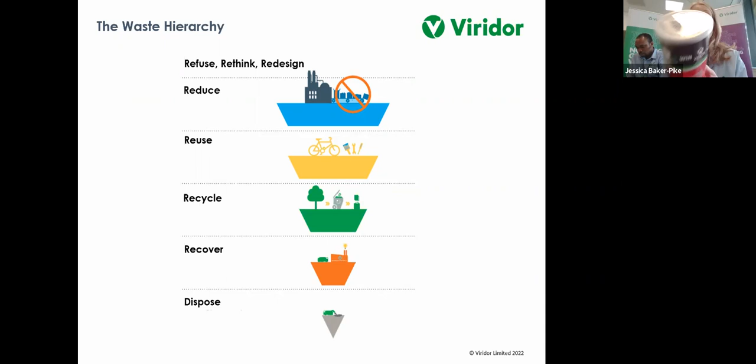At the top then, as consumers, we can all make choices about what we buy. We can refuse to buy certain bits of packaging. I don't know if you can work out the brand of this packaging I'm holding up, but it packages crisps using plastic, foil-lined fibres, cardboard, and metal.

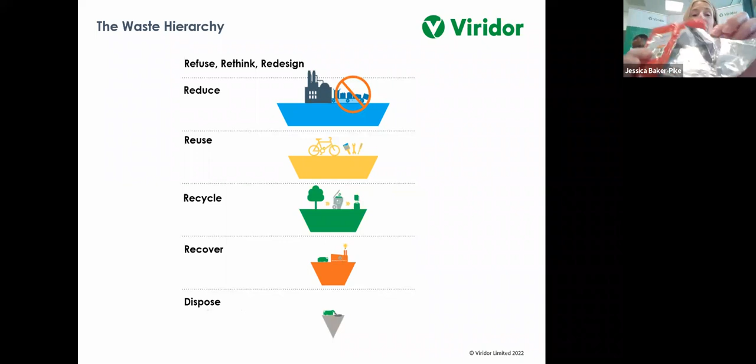Really, there are more efficient packages for crisps that use a lot less material and can now be collected for recycling across the UK. So we can make choices as we buy things, and work with designers to rethink designs so that the materials made, the things we buy, can be processed right through that whole life cycle, including what happens once it goes into a bin.

So we work with designers. Samples of material are sent through our processes, for example our polymers recovery facilities, to make sure they can be separated effectively. Along with those at the top of the hierarchy is to reduce, and really that just means buy what you need.

That is the most important thing. As a company, we have our procurement teams managing that for us, but we're all individuals - we all have the opportunity to make choices, as I say.

The next level down is to reuse, and for us that means keeping things in use for their designed purpose - fixing things. Here, of course, on a large industrial site, we have technicians whose role day in, day out is to monitor parts and fix them as necessary.

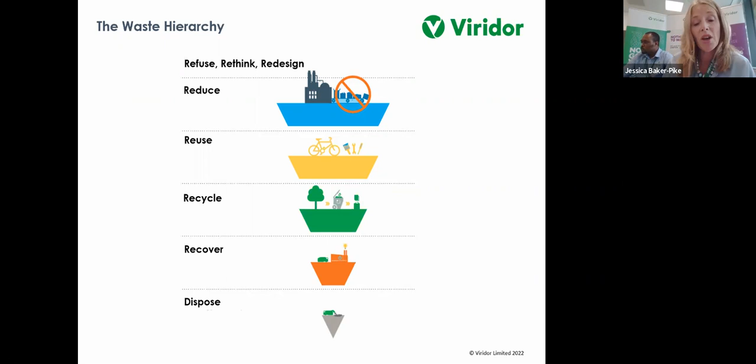So we operate the largest fleet of energy recovery facilities in the UK. Here you can see a view of them. They operate across Scotland, Wales and England, and most of our facilities have two line processes, which gives us both the capacity and contingency.

They normally treat approximately 300 to 500,000 tonnes each per year, so significant amounts of material received daily at all sites. Runcorn is our largest, and that treats over 1 million tonnes of non-recyclable waste. It takes waste from Manchester and the surrounding area, and is run as two businesses.

Runcorn is going to be our first site to have carbon capture technology installed.

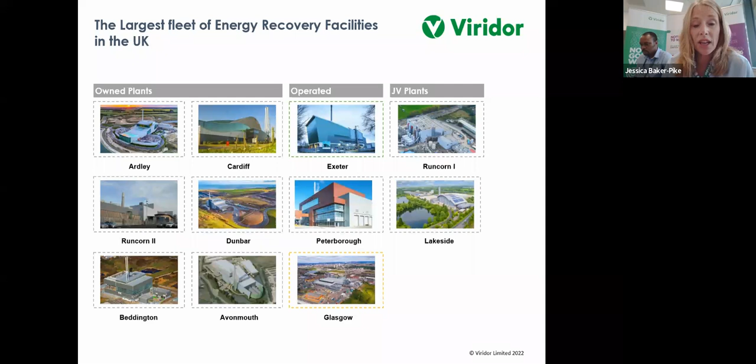Ardley Energy Recovery Facility is the place where Innocent and I are both sitting right now and where we work. It's located just south of Junction 10 on the M40, south of Banbury. So driving around the area, as I'm sure you do, you may have seen it clearly from the M40.

The history of the site is that it was a limestone quarry, and waste has been brought here for treatment since about the 1960s. You can see some of the history from this site in this aerial photograph, which was taken during the commissioning stages of the energy recovery facility.

But as I say, the advantages of having the building we operate in are that we can control the air within it, which is much better in terms of containment and controlling the gases.

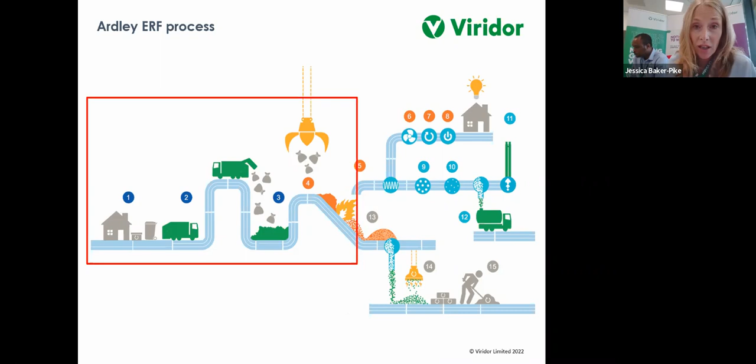We receive it and it's delivered into a store, where the material is mixed to make it the best fuel it can be and lifted up high so it can fall down as it's burnt through the process. Now I'll show you some images from within the facility - this is from inside the tipping hall.

I wanted to show you the scale of our operation - you can see a loader vehicle responsible for keeping the tipping hall floor clean. We have 10 bays for deliveries. All vehicles arriving come through the tipping hall and reverse towards the bunker to deliver their loads. We can have up to 3 vehicles in the tipping hall at any time.

So there's an awful lot of material. It comes to us first over the weighbridge, where we check documentation and make sure it's the right waste coding for us to treat, because we're here to treat just household type material - no clinical, no hazardous wastes are treated at this site.

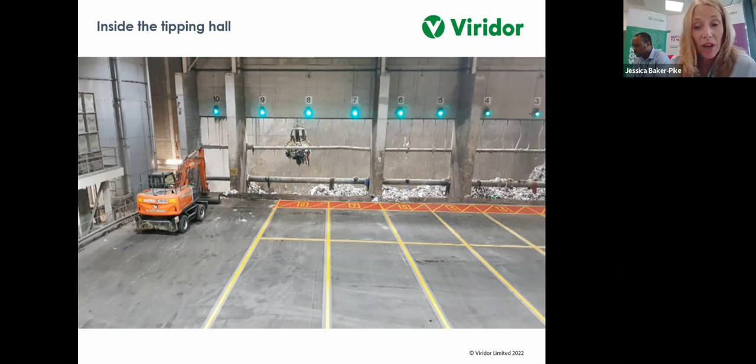This is a view from the control room, looking down on the store. There are 2 grab cranes that move on overhead gantry rails, which mix the waste, and then it's lifted to deliver it as fuel to the hoppers, which feed continuously onto the grate. So our process is always operating, 24/7.

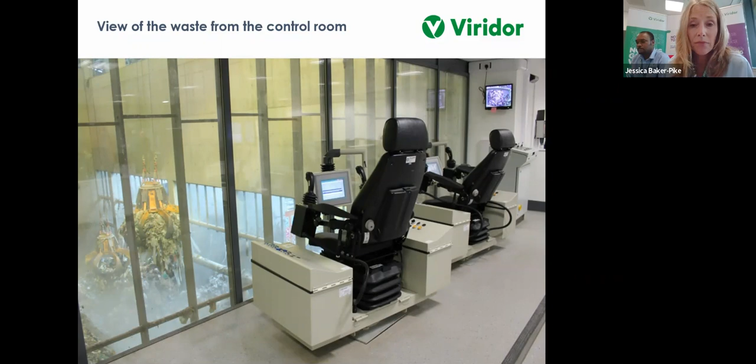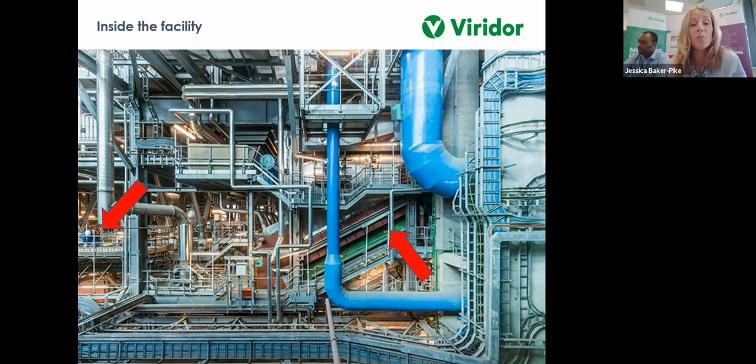So the waste is burnt at high temperatures. We must achieve over 850 degrees Celsius, and it takes approximately 45 minutes for the waste to be fully combusted as it moves down the grate.

The top line of outflow from this combustion is to generate power. Like traditional power stations, we use water to generate steam to drive a turbine, which in turn feeds the generator. As the very hot gases are sucked through a cleanup process, we pump degassed and demineralized water in pipework through the hot gases in the opposite direction, and all the heat energy moves in through that pipework, heating up the water.

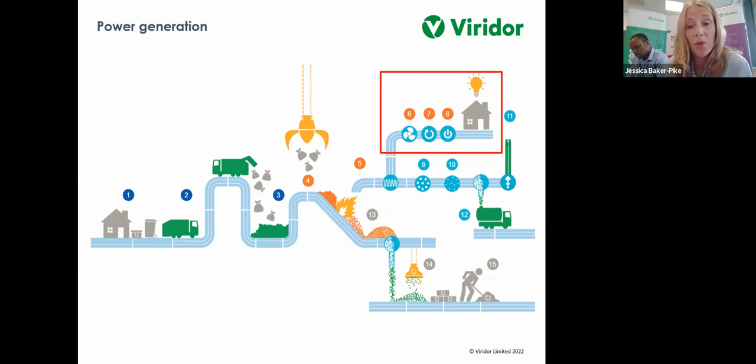The electricity flows out through these cables onto transformers, and it is used to power our process, and the rest flows through cables and leaves for export via our local substation. Then the steam condenses back into liquid water, and it's recycled again and again.

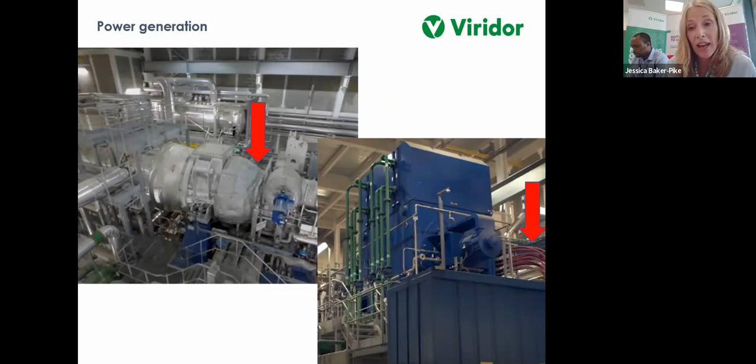The flue gas cleanup process is absolutely vital to our operations, and it's the middle line of our process diagram. It explains what happens as the waste is combusted, how we clean the gases. They are sucked through ducts as they're cleaned, and there are three processes, the first of which is within the combustion chamber, where we inject urea pellets - that reacts to reduce NOx gases.

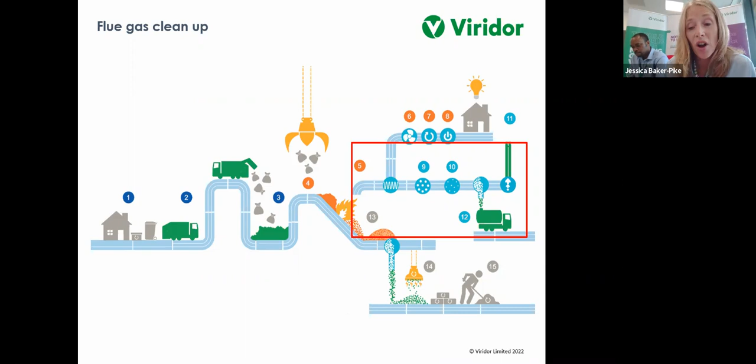We sieve those out through fabric filters, and once that material has done its job, it's termed air pollution control residue. The gases are sampled before and after the filtration system, controlled by the computer system, so that we know we are operating under our consented emissions levels.

So here's the reality of these silos for the lime and carbon. And then we've got the area where the air pollution control residue is stored, and below is the hookup where the off-taking vehicles come to remove that material.

This is an exciting thing because we have a contract with a company called OCO Limited, and they take that powder away to be made into products.

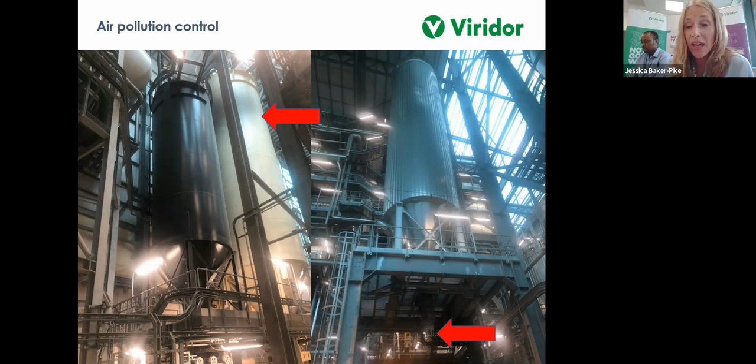So here you can see on this photo a carbon negative building block. The lime still has some reactivity, and basically that reactivity makes the difference from the air pollution control residue, which is a hazardous waste.

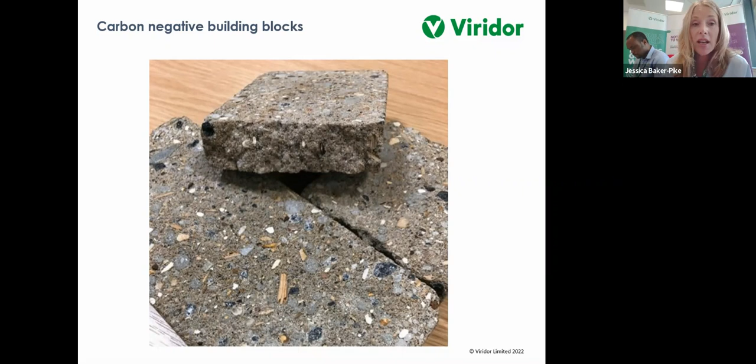OCO inject carbon dioxide into that powder, and it's like a quick limestone reaction, which encapsulates everything within the pellet. The pellets can then be put as a product into building blocks, and because it entraps carbon dioxide, they are carbon negative.

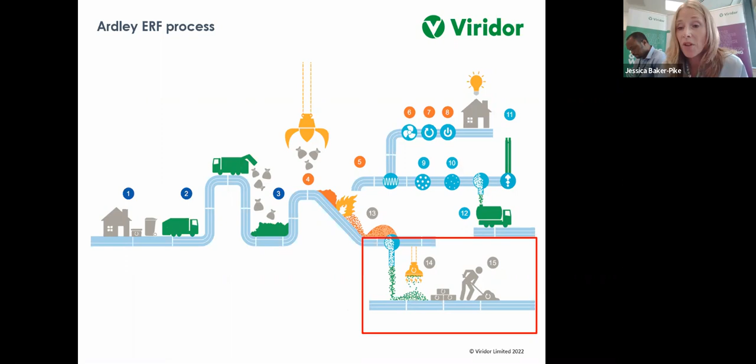So the final line of the process diagram is what we do to treat the ash. The ash drops off the grate and it's then processed into recycled products.

Here you can see it comes onto a vibrating table from both lines. In fact, the ash drops over a roller, which controls the flow of the waste as it falls down the grate, and it drops over that roller into water that we've already used at the site - that's the start of the quenching process.

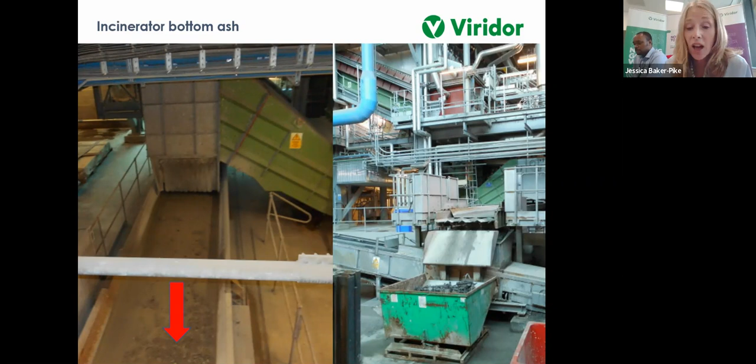Once it's been quenched and cooled, it moves onto and is pushed out onto this vibrating table, which moves and collects the ash from both lines. We then remove oversized things from the ash - they are almost always metals, and that goes for recycling. The smaller ash fragments move on through conveyors and go under magnets, which separate out ferrous material.

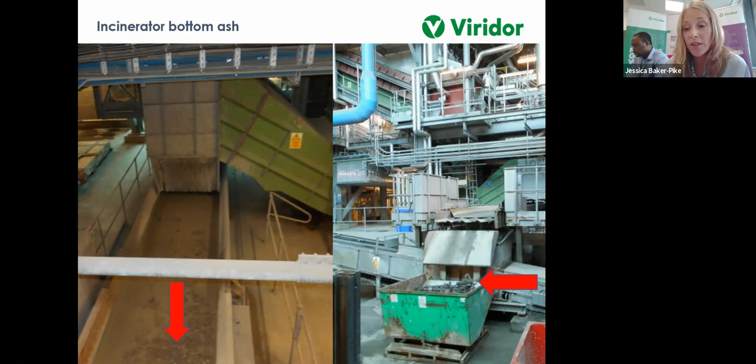That again then goes for recycling. So once the metals have been removed, the remaining ash goes on a short journey via conveyor to our co-located business partner, a company called Fortis. You should get the link for them coming up in the chat if you're interested to look them up.

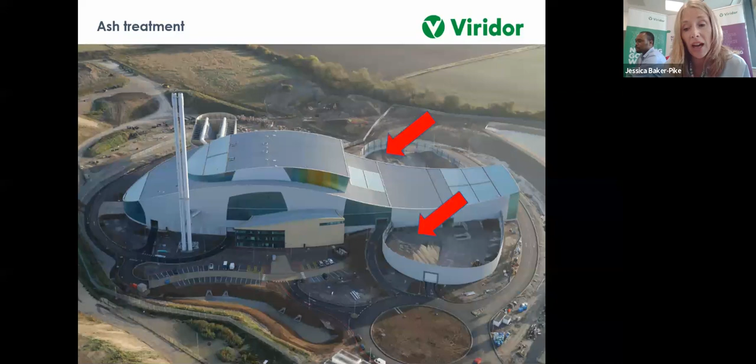What they do is store the material here, and it's sampled before it goes through their process, which removes more metals for recycling. Once that's done, it's called incinerator bottom ash aggregate, which can be used for road building. So it is in fact a product for use.

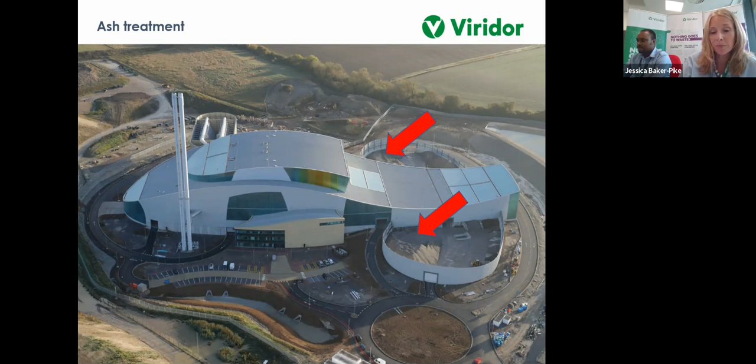So that is our process, and I'm going to hand over now to Innocent, who's going to go through the control systems we've got from environmental monitoring. Cool, thank you so much, Jess. That's okay, that was a good one.

Good afternoon everyone, my name is Innocent, as has been said. I'm just going to walk us through a bit on the Environmental Agency, Industrial Emissions Directive, and our permit here. The Ardley site is operating on Environmental Agency permits, and basically this permit is created for us to have a limit on whatever emission limit for whatever substance or particle that is coming out from our operation. These emission limits are controlled by the IED, the Industrial Emission Directive, which controls all the pollutants that come from big organizations or large facilities involved in combustion, as we are here.

If you see on the far right there, that's actually our two stack emission points where the emission particles are emitted. But it's not just emitted free to air - this is controlled by the limits given to us by the Environmental Agency.

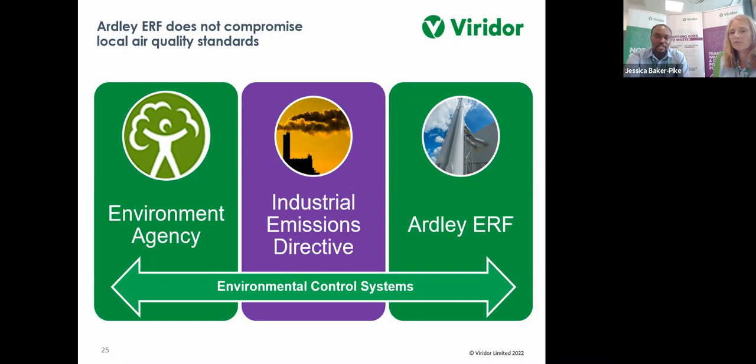I want to go through a bit of our permit, discussing both management and operations - what we do - and then I'll discuss emissions and monitoring, what we monitor. I'll also tell you about recording and how we send notifications if there's any form of breach, just to let you know we're being regulated heavily by the Environmental Agency.

Every site that has a permit has a site regulator, so we have our Environmental Agency site regulator. Just to talk about responsibilities here.

We have the site manager, the operations manager, engineering, maintenance, and EHS as well. These are people whose responsibility includes understanding everything about the permit and ensuring that we conform to that. Then we have our shift team leaders and their assistants, who we ensure understand the permit and our permit requirements and are conscious of the environmental impact.

Our engineering team, the shift technicians, even the apprentices when they join us - we make sure we train them on our permit management, and of course the tipping hall supervisor. This is the team that actually receives the waste, which we call fuel, into our site, and they ensure that whatever waste comes in has the right EWC code, the right waste code, before it actually comes into our site via the weighbridge.

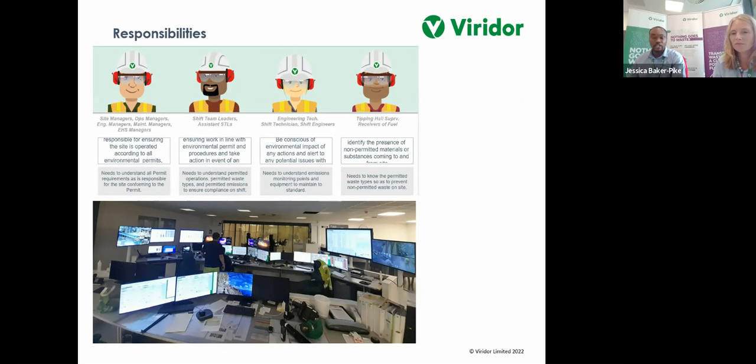We make sure the accident management plan is in place, along with efficient use of raw materials. Just to talk about the environmental emission and the background on which we monitor whatever we're monitoring on site - we've got the Best Available Technique reference document, which aims to establish an extensive set of emission limit values, like I put it there.

So this reference guides us all, even the incineration plant technology, to make sure we are achieving the emission levels that are set up for us.

Like I was explaining, these emission limits that are being set up with that reference actually oblige us to have continuous monitoring of some substances and also periodic monitoring of a broader range of substances, which I will inform us moving on as well.

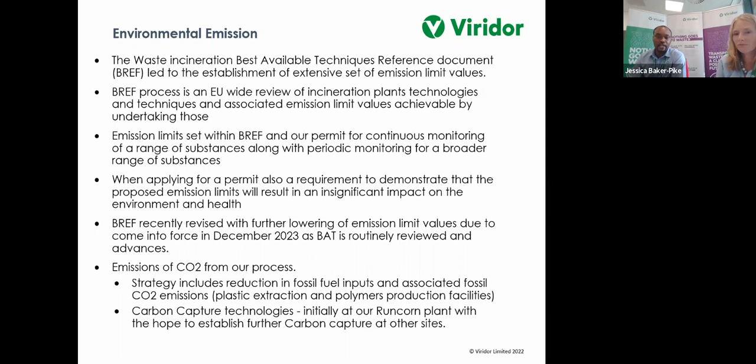So Jess has talked a lot too about CO2. Basically from our process, as you all know, CO2 is of course being released, and there are strategies now in place for us to actually go into carbon capture technology, which Jess was talking about, initially at our Runcorn plant. So this is now what the company moving forward is trying to get into, to see how we can actually go into carbon capture.

Next slide, please. So just to go a little bit more into our operations. In terms of our operations, we ensure that the waste comes in having the right EWC code before it's allowed. But at the same time, we are obliged to make sure that during the operation, the temperatures we are required to use here, from 850 degrees.

Is being maintained. And of course, we are being mandated to report all exceedances.

So then in terms of emissions and monitoring, which I believe most of us will be interested in, this site, in terms of anything going to the drainage, no water goes to the drainage. It's a bunded site, so that's all right. But in terms of monitoring, we have point source emissions, then process monitoring, and then the residue, which Jess was explaining, the ash monitoring, and I'll tell us in a minute.

So in terms of fugitive emissions, we monitor odor as well. We're obliged to have odor management, so we have odor suppressants here, making sure that we are not, of course, keeping the neighborhood uncomfortable due to the odor that comes here. So there's odor suppressant and odor management in place.

And in terms of noise and vibration, we monitor this as well and make sure that we don't have any form of inconvenience to the people that live around and also, of course, to the environment. So in terms of monitoring, we have the point source monitoring, continuous emissions monitoring, and periodic emissions monitoring.

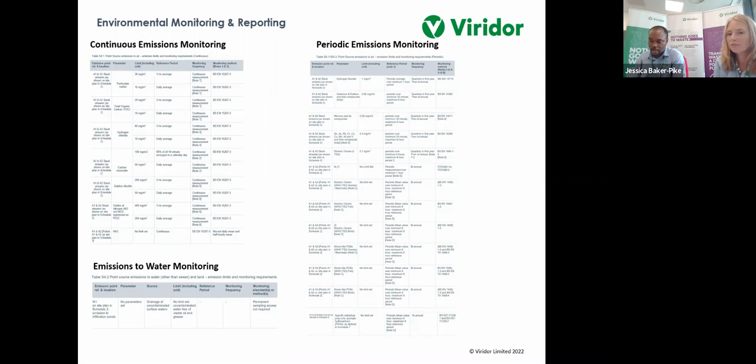And of course, we report them basically to the environmental agency. We report both quarterly and we've got reports for 6 monthly, and we also have site visits where the environmental agency are always on our site for just a visit, periodical visit, could be quarterly visit, and whatever report that is due. We've got pollution inventory reports that we send across to the environmental agency. And I'm just going to go over.

So in terms of ash monitoring, when Jess was talking about the residues, we have what we call bottom ash. So basically after the whole combustion process of this material, we have the IBA, the incinerator bottom ash, and we are obliged to have continuous testing on them.

And then after treating the flue gases that come out from the combustion, whatever we use to treat those gases, we call the APCR, air pollution control residue. These residues we are always reporting to the environmental agency, and we have to make sure they are all tested for things like dioxins and furans, ensuring we stay below limits.

So a little bit on information recording, we are obliged to keep all records and send all notifications if there's an incident. Like the last incident we had here, a fire in the bunker. We had it in the tipping hall.